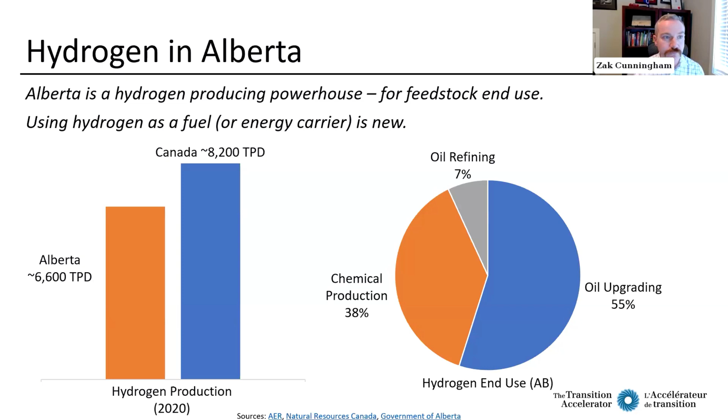So carbon intensity. Really what it's all about with the move towards hydrogen is trying to reduce our carbon intensity away from incumbent fuels. So when we talk about hydrogen production, it is really important to recognize some of the nuances in production methods and carbon intensities, more so than the colors themselves, even though colors seem to make themselves most noticed on social media and other forms of communication.

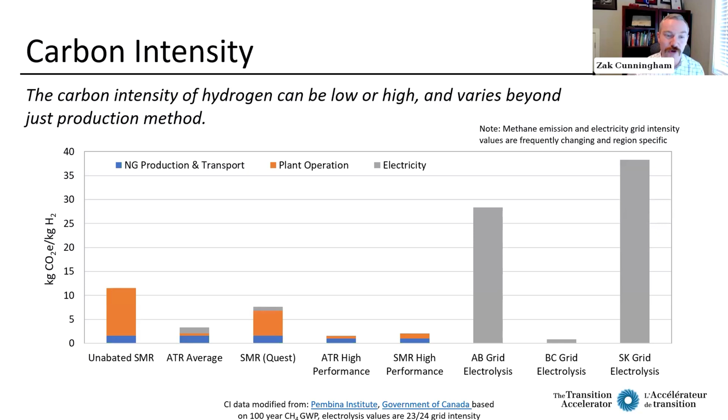Green is not good and blue is not bad. It's more nuanced than that. So if we talk about hydrogen fuel markets of the future, certainly there are a number of use cases that hydrogen could fill a role. But in its early stages of adoption, really we should be focused on the most economic use cases. And well, what are those?

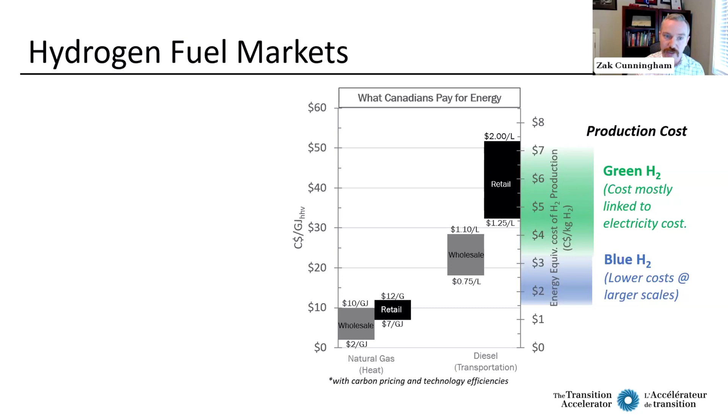And if we look now at some of the costs of producing hydrogen, we can see that we have green, which is in that $3.5 to $7 range-ish, and that's mostly linked to electricity costs, of course. And then beneath that, you can see we have blue hydrogen, natural gas-derived hydrogen, more in that $1.50 to $3.50 range. And again, that's due to the larger scales of how these operations work.

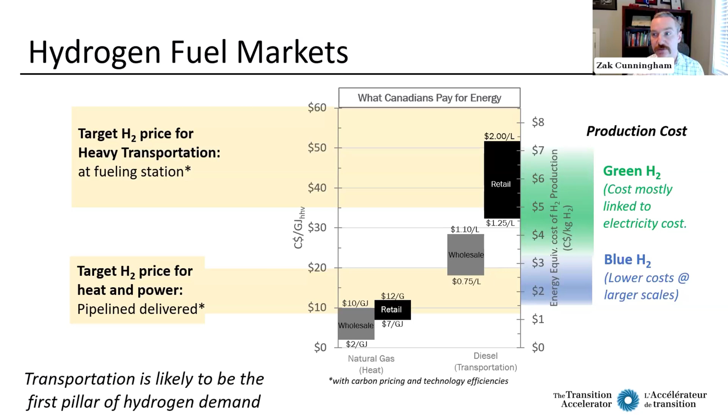And if we account for efficiency improvements in a transition to hydrogen, accounting for fuel cell efficiencies versus internal combustion engines, this brings our target price at the fueling station or at the pipeline more to that $5 to $8 range at the fueling station, and more in that $1.50 to $2.75, $3 for pipeline delivered heating. So really, transportation is likely going to be the first pillar of hydrogen demand, and that's what we should be focused on in the initial stages.

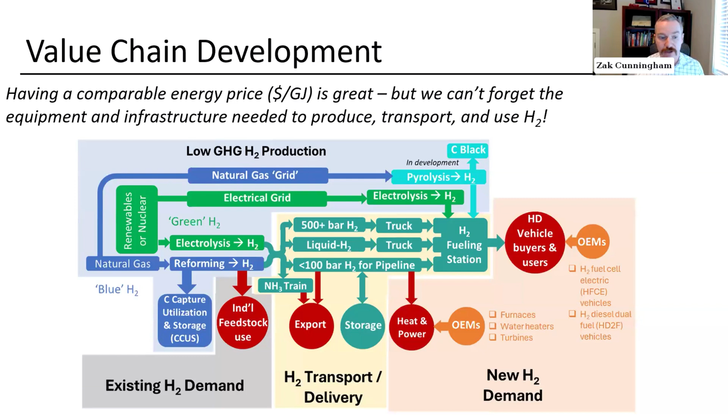Now, when we talk about hydrogen adoption, having a comparable price on an energetic basis is great, but we really can't forget that there is equipment and infrastructure and people needed to produce, transport, and use hydrogen, and that's a whole new value chain that needs to be built up. So you can see in this example figure here, we do have some existing demand, some existing production, but there are a whole number of other areas that need to be developed in terms of storage, transporting, OEMs, all the manufacturers, all the parts that need to go into this. So there's many direct and indirect stakeholders in this value chain.

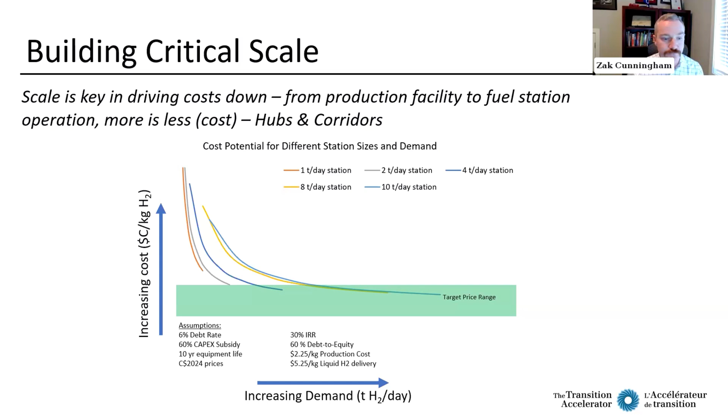So in conclusion, I just wanted to highlight some of the high-level points: Alberta is a major hydrogen producer already. Carbon intensity should be the focus of hydrogen supply, not necessarily color. Transportation demand should be the focus initially. Value chain development and building scale really is key. And a hubs and corridors approach is a solution to this.

So highlighting some of these opportunities next is my colleague, Dr. David Layzell, who I will graciously pass the webinar over to, to talk a little bit more about the Calgary Foundational Report.

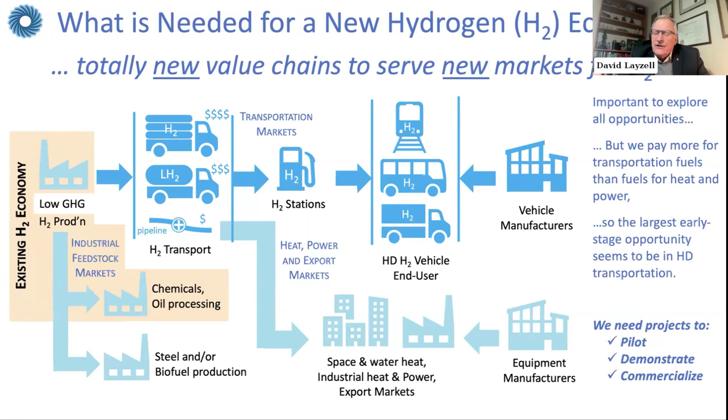So that's a lot of what we'll be talking about today, but not all. And for all of these things, we need projects to actually pilot new ideas and new initiatives and see if they really work, to demonstrate them and to get some of the key decision makers comfortable with this as a different way of perhaps delivering energy services, and then ultimately to commercialize those technologies.

Over the last 5 years, especially with the work done in the Edmonton region and the Edmonton Regional Hydrogen Hub, there's been a lot of pilot and demonstration projects, but also a lot of really exciting things happening in the Calgary region as well. This is kind of a high level overview. It's certainly not comprehensive, and I'm sorry to those I've left out, but the Alberta Motor Transportation Association, which operates across Alberta, has been very active in trying to bring large heavy-duty hydrogen fueled vehicles forward, everything from the AZETEC project, with support from Prairies Can and Emissions Reduction Alberta.

There have been hydrogen fuel cell bus projects operating in both Edmonton and Strathcona. And in Calgary, we're all very proud of the work that Canadian Pacific Kansas City Railway is doing, building some of the first in the world hydrogen fuel cell electric locomotives. More recently, ATCO has built a hydrogen heated home. And in Calgary, District Heating, Atlantica has been piloting the co-firing of hydrogen with natural gas for district heat in downtown Calgary. So exciting work they've been doing there.

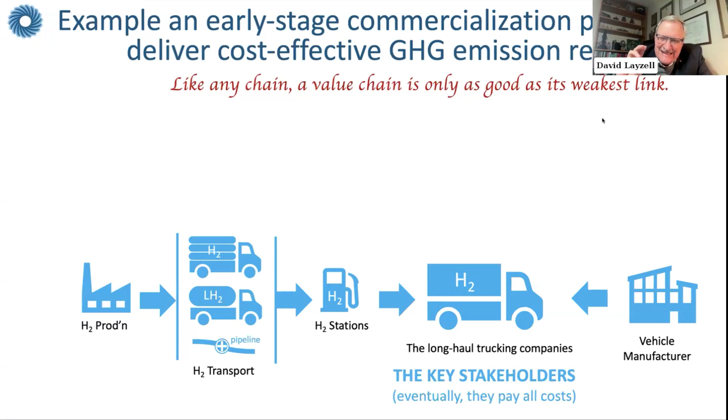For the trucking companies, one of the first things they look for before they would ever consider buying a vehicle from a manufacturer is whether the fueling stations are available. And I would argue that we have to really start seriously developing a focus on fueling stations.

And our analysis, and that of many others, is that in order to create an economically viable fueling station, we need to really be looking at something in the range of 4 tons of hydrogen per station per day. You also need a commitment for at least 10 years that this station is going to be able to deliver that kind of hydrogen, in order to be able to write down the fairly significant capex cost it creates to create one of these stations.

And we would argue that in looking at opportunities around Canada and specifically in Alberta, the greatest opportunity is the Edmonton to Calgary corridor. And the importance of focusing on a hydrogen corridor, we need really 3 fueling stations there, one in Edmonton, one in Red Deer, and one in Calgary, in order to provide a little bit of redundancy if one of the stations goes down, so you could actually still move vehicles with 2 stations.

But it also means that what you have is essentially a scale where we can get enough demand and enough vehicles in order to make this whole value chain work. So in order to provide that 4 tons of hydrogen a day, in the heavy-duty trucking sector, these vehicles are used a lot. And we're talking then, over a 4-year period, we have to build to a stock of about 184 of these trucks running this corridor back and forth, essentially driving 300 days a year, 6 days a week, 650 kilometers per vehicle per day.

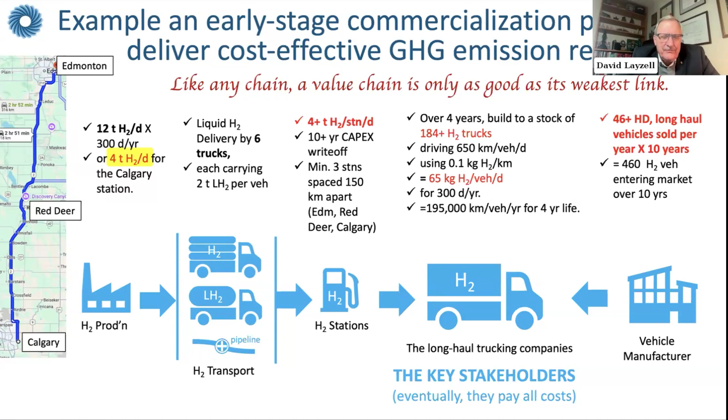Let's now, with that in mind, that 4 ton, 12 ton a day sort of hydrogen marker, if you like, let's look at some bottom-up estimates of hydrogen demand from key stakeholders. We'll go back and start by looking at the trucking on the provincial roads in Alberta around Calgary. And we'll look at specifically the City of Calgary vehicles and the airport vehicles and the trains in the Calgary region.

Okay, so this is the heavy duty trucking. And Alberta Transport has this wonderful website. Found it's interesting to go through. It looks at transportation in Alberta and it does mapping and it shows all the Alberta highways. And when you click on each of these roads in the map, it pops up effectively details on how many trucks and cars are moving on that particular highway every day. And we can take that information and analyze it. And we've done that for all the roads here.

Certainly the ring road in Calgary and Highway 2 through the center of Calgary. That's the only ones we've looked at within Calgary itself. And then from the ring road here to the ring road in Edmonton. And from this ring road on the west side of Calgary out to Banff National Park, on the east side to the Saskatchewan border, and on the south side down to the US border. And then we assume that 75% of the tractor trailers running would be hydrogen, maybe the other 25% battery electric or biofuel, and about 50% of the single unit trucks being hydrogen.

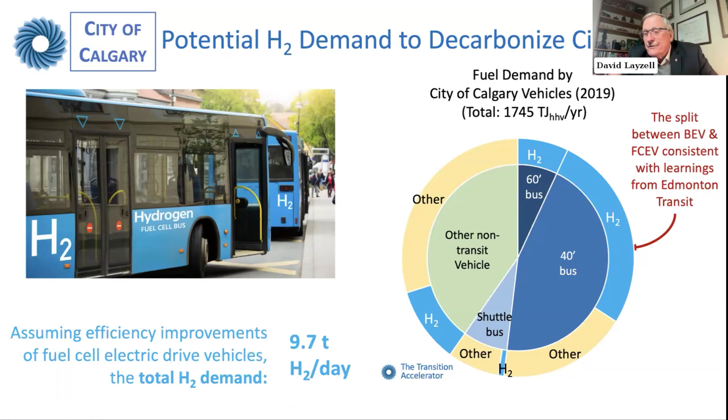We basically estimated the proportion of the existing bus fleet that would be replaced by hydrogen, shown in the blue here. And in total they come up to about 9.7 tons of hydrogen a day. So that would be the hydrogen production and demand for these vehicles. And that takes into consideration that a fuel cell electric vehicle, especially buses, get a much better fuel efficiency in terms of energy used per kilometer than a diesel engine, partly because of regenerative stop and go and better fuel efficiency, as we've learned from some of the preliminary work in Edmonton.

The city of Calgary also has a lot of heat and power demand in its city infrastructure. In total, it uses about 1,800 terajoules per year. A lot of it is in the wastewater treatment plants, both the Bonnybrook, Fish Creek, Pine Creek, Bearspaw. They're major users of natural gas.

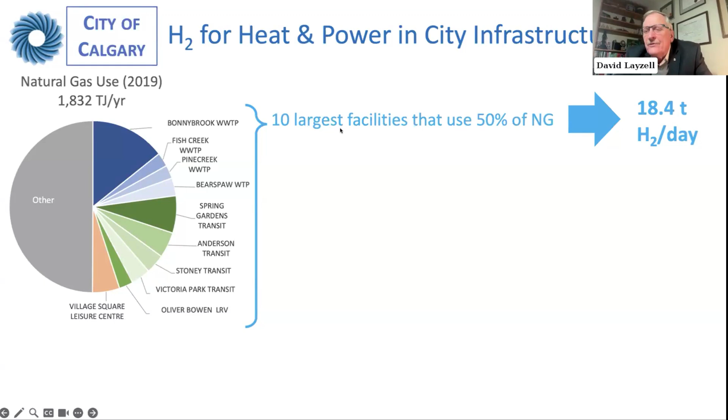The transit, bus transit also as well for washing the buses, and there's a lot of energy use in transit. There's rapid transit and the Village Square Leisure. About 50% of all the natural gas used is in these top 10 facilities. And so we looked at what would be the implications of moving those to hydrogen. And it'd be about 18.4 tons of hydrogen per day.

But the reality is many of these same facilities and some other facilities actually use a lot of electricity as well. And right now, that electricity tends to be taken from the grid and therefore has a fairly high carbon intensity. And so one possibility is we pick those facilities, like some of the wastewater treatment plants, which have both a high electricity use and a high natural gas use, and say, what about the feasibility of putting combined heat and power, where hydrogen is going through basically a reciprocating engine and it's generating electricity, and the waste heat is being used to heat the building.

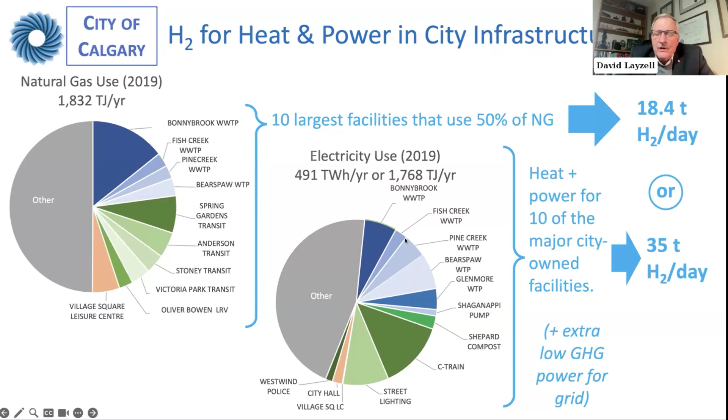And in that case, we were looking at 35 tons of hydrogen a day, and it would provide the top 10 of the buildings and meet their heat requirements, but also meet their electricity requirements, and in fact put quite a lot of extra electricity on the grid as a very low carbon electricity because it's coming from low carbon hydrogen. And then that's another opportunity that I think could be explored to see whether that might work at one or more of these facilities.

So in summary, if we look at the city of Calgary itself, it has a potential for maybe 6.2 tons a day of hydrogen for transit, other vehicles 3.5 tons, building heat and power 35 tons a day. So a total of about 44 tons a day of hydrogen. And as mentioned by Zach previously, the building heat and power is going to require pipelines in order to make it work, or if possible, on-site production of low-cost hydrogen. Whereas for these transportation opportunities, there is a possibility, at least in the interim, to bring in hydrogen as liquid hydrogen by truck.

Then we can turn our attention to the airport, the Calgary airport. And then what are the potential markets there? When you actually look at energy use in the Calgary International Airport, the vast majority of energy use is jet fuel. 656 million liters per year. This is 2019, pre-COVID. This is the demand for jet fuel. And all the other fuel use is a little bit of the lines at the top of this bar chart. We'll talk about them in a minute. Let's just talk about the jet fuel.

There's a lot of discussion in longer term views that liquid hydrogen would be a fantastic jet fuel because it's so light. The problem is it carries a lot of volume. So you'd have to totally redesign the airplanes, totally new kinds of engines and new shapes of the airplanes to handle large volumes of fuel. And that's certainly possible. There are companies that are doing it. You can look them up on the web. You got these really neat looking airplanes that are hydrogen airplanes that are being designed.

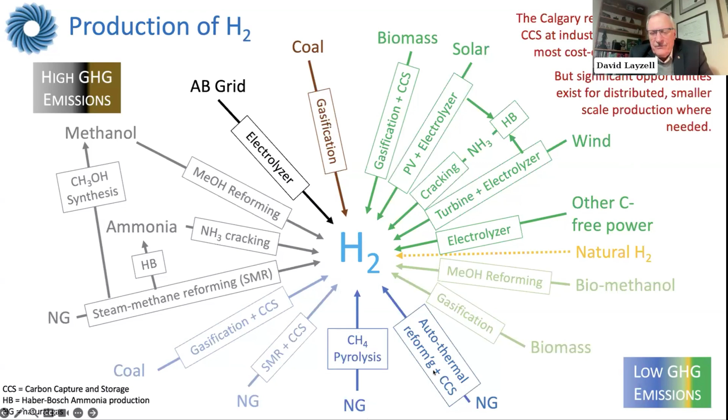But for hydrogen to serve markets for heat and power, we also need to think about hydrogen pipelines. This is a technology which is available today and will be coming online, I think, in the Edmonton region to move hydrogen around the province, and that could help to provide hydrogen supply needs. If we're looking at pipelines, we can look at the ATCO natural gas transmission system.

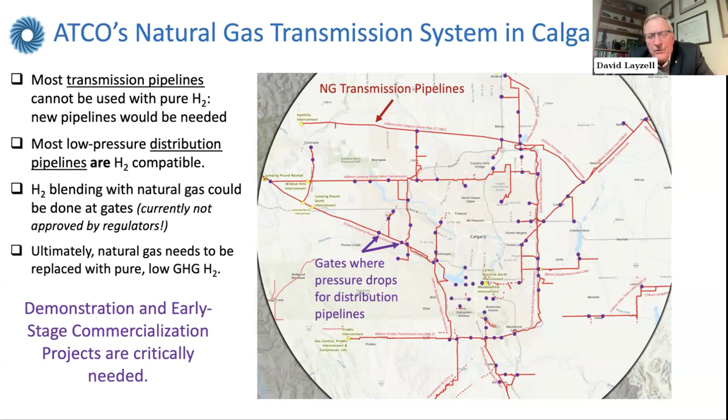Ultimately, natural gas needs to be replaced, though, with pure low GHG hydrogen. And it's certainly important to have demonstration; early stage commercialization projects are critically needed to do this. And ATCO is starting to do some of that, as we mentioned previously, and I think more is needed. One of the things that could be done in the Calgary region is to really look at the opportunity of some pipeline corridors that currently exist but aren't being used.

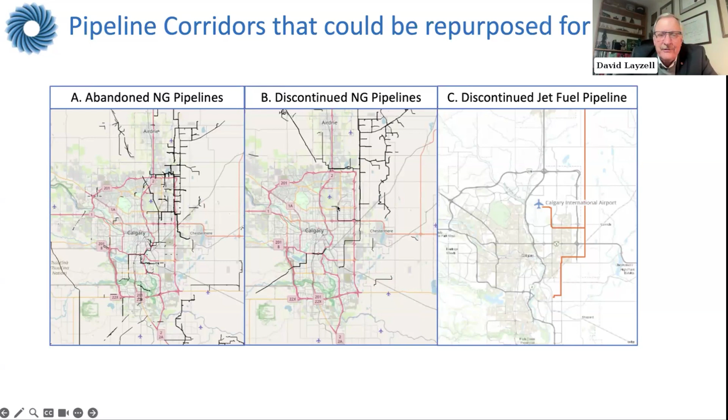The black lines on this graph show in the Calgary region the existence of abandoned natural gas pipelines. So the pipeline corridor exists. It may be possible to repurpose those and use them for hydrogen or even for CO2 and sequestration. There's also discontinued natural gas pipelines, where the pipelines still exist and have not been abandoned, but they're discontinued. It is possible to put maybe a liner down them that can carry hydrogen, and we can see where these are, and these are in some strategic areas, even going right through to the airport. And we even have a discontinued jet fuel pipeline that already exists.

So I'd like to end then by just identifying a project from the City of Calgary that has recently come out. People in this area might have seen a call for proposals back in October for a source of hydrogen supply, but they're working to test a number of municipal hydrogen vehicles, and they're looking at two kinds. We're looking at fuel cell electric vehicles: forklift truck, passenger vehicles, an excavator, and backhoe, and another class of truck with an internal combustion engine that also burns hydrogen. And they're also looking to retrofit maintenance bays at two of their garages to support the hydrogen vehicles.